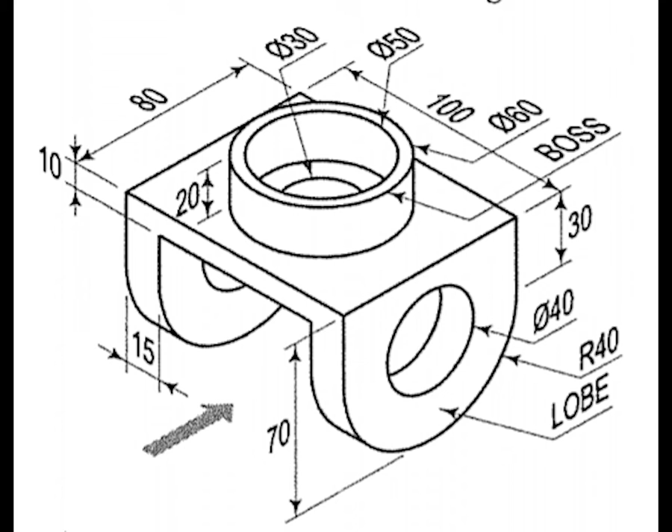Going to new, select and then OK. Here going to sketch and select the plane, and we will make a rectangle with the center point option.

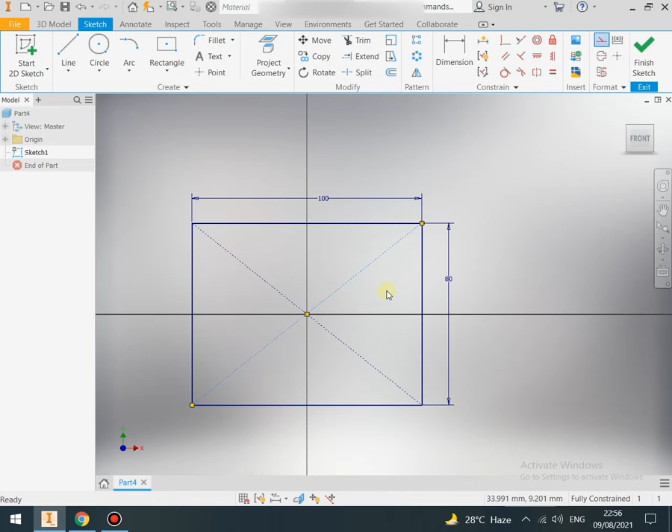You can choose multiple other options, and then add the dimension as mentioned in the sketch before starting. Now add another vertical dimension, and here the center lines make the rectangle to center point.

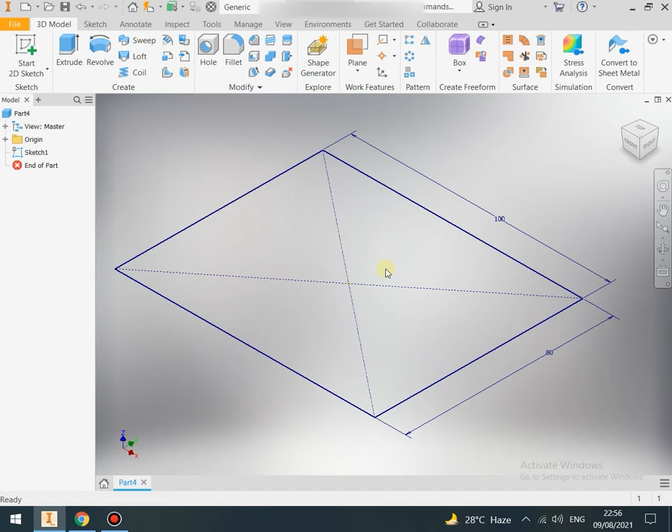Now set this view as default top view, and this view we will select as default isometric view. Now we will click home, then automatically your view will go to this.

And now extrude, it is quite easy. And then going to another sketch, and we will make a line, we will make another line.

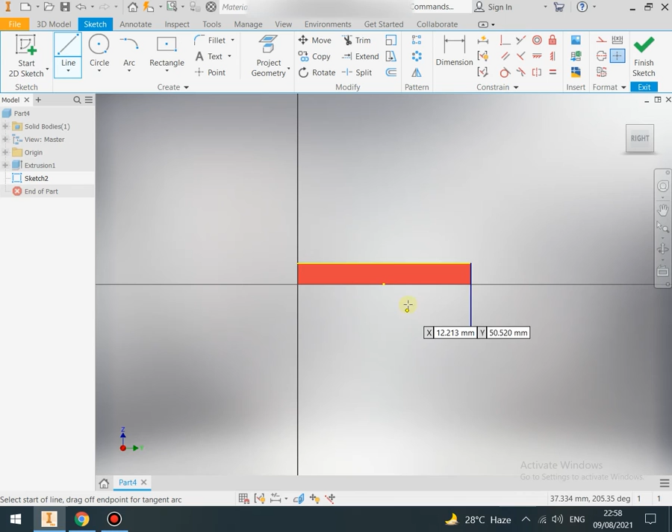I just change the color, don't worry about it. And another line, and this is the dimension I mentioned on the sketch, you can see.

Now this line will be equalized. Select the equal button and then select the initial, and then select what you want to equal, click it.

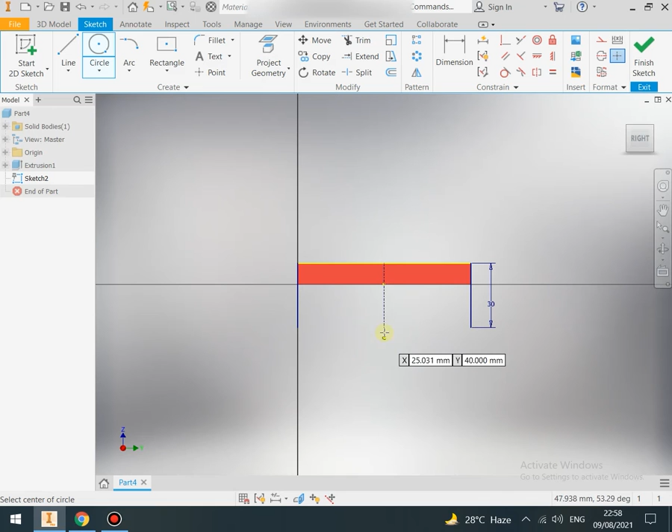Then make another circle, and this circle touches the 2 points, and trim it. Trim, and then the last one trim, and make another circle with desired diameter.

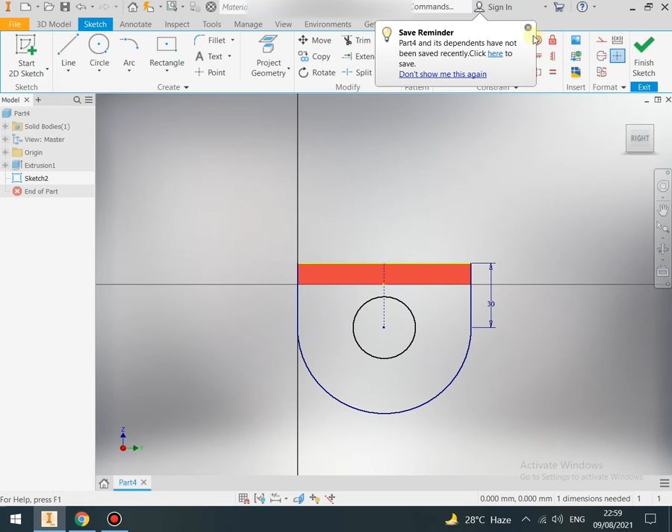Let's select close it, and select the dimension here, and select the diameter, enter the diameter input.

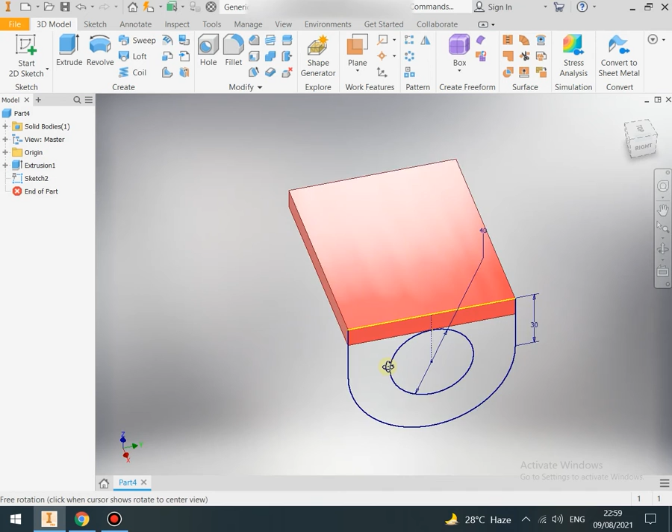The circle will automatically reshape, and the geometry is complete. And then go to extrude and select the area you want to extrude, and then change the direction and thickness. Select this option and this direction you want, don't worry, this is ours.

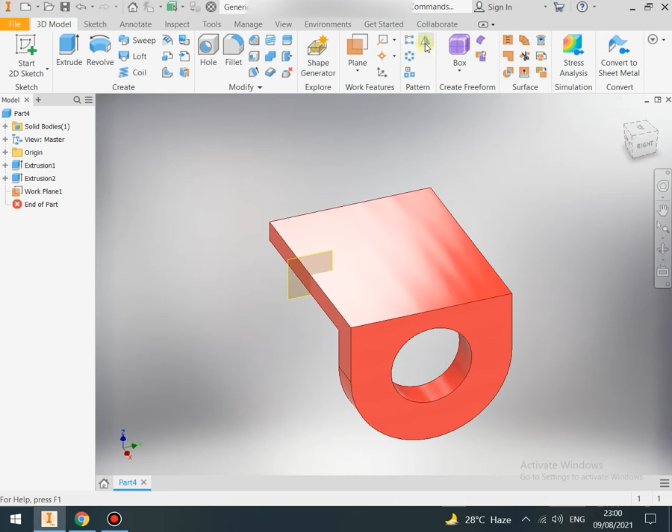And now select the plane, I choose mirror, it will save your time.

This geometry I select, and this plane you want, you can see our feature can be mirrored. You don't need to make it in another direction separately, it is quite time saving.

You can see, first of all we make the plane, and then go to mirror and select the feature, and then select the plane. It is quite simple.

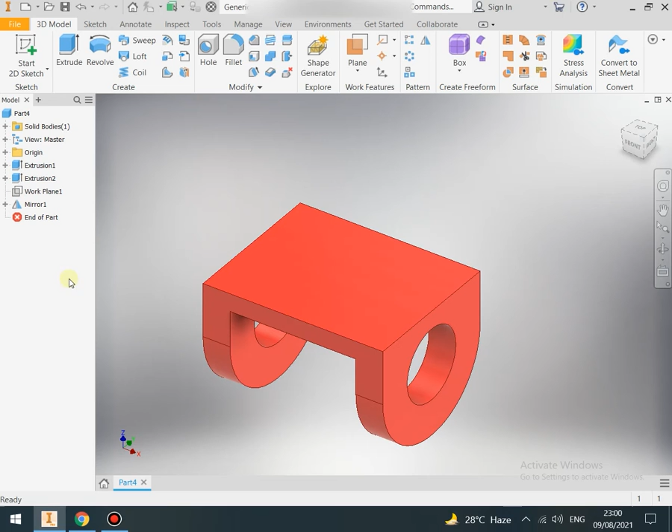Now select this surface, and then make the sketch which will be the circle, which will be the circle, and I drew it.

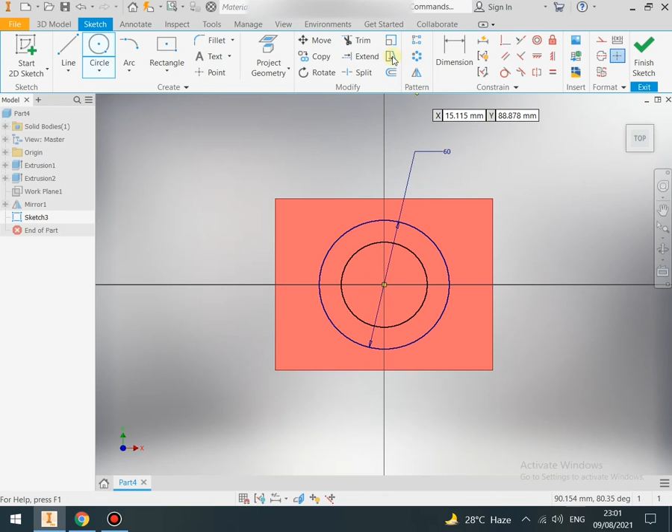Select the dimension, and input the diameter, and let's make another circle, and then similarly input the diameter.

And going to extrude, you can see the process repeats. We made the geometry and then extruded it.

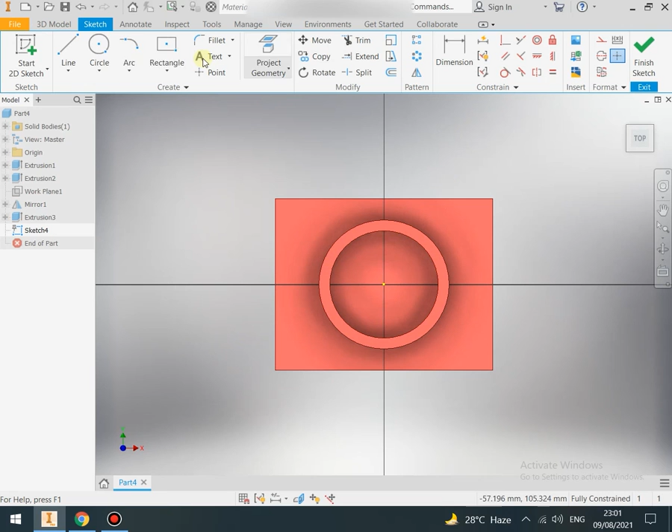It is quite simple. And make another circle which will be the hole in our geometry. It is simply with the help of extrude, the dimension which will be the diameter of the circle, and after that we will convert it into a hole.

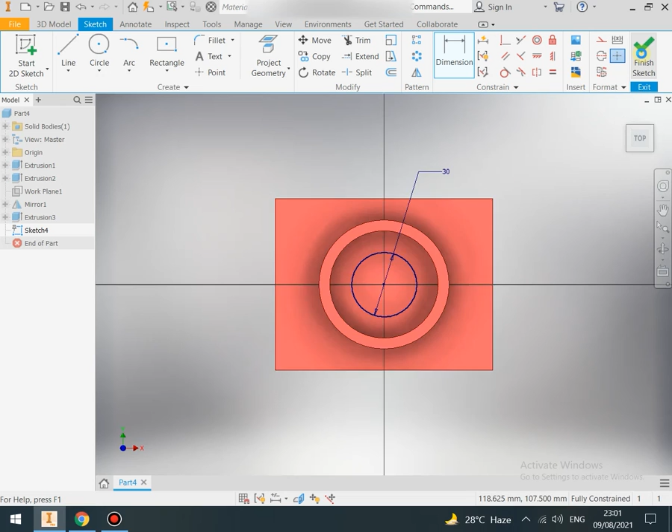Going to extrude, select the geometry, select the hole, select cut, and then the through-all hole we required. You can see the hole is complete and our geometry is almost complete.

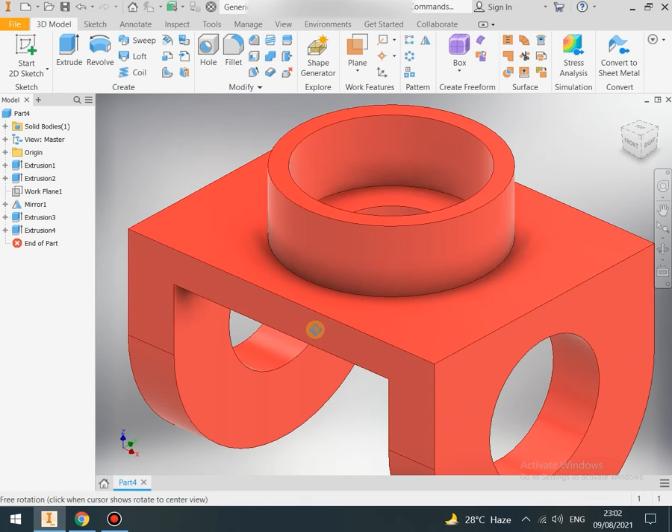And let's add another feature that looks pretty good. The geometry is ready, your first exercise, and going to the thread tool and add it.

It is quite easy and automatically complete. Yeah, you can see our first geometry and 3D render model, which looks easy and quite simple.